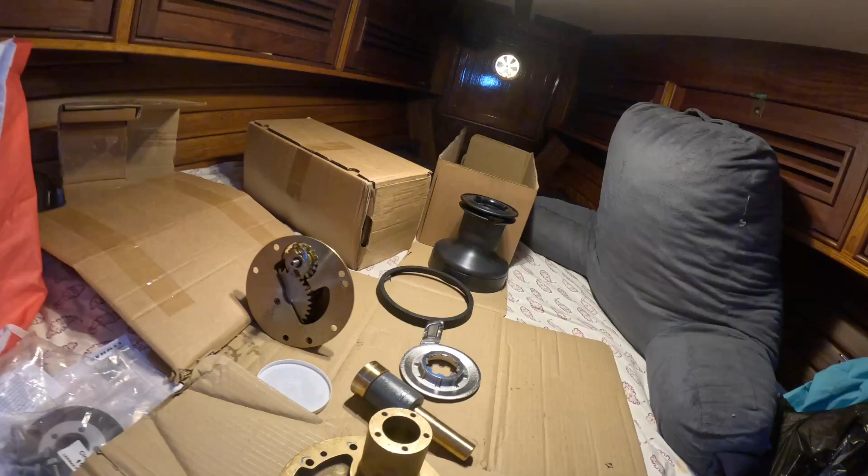This week we install an electric winch for our Genoa furling line. It's a big job with a lot of components.

I haven't had hair and makeup yet.

In the middle of the electric winch install, Greenpeace came to visit. Later on in the video, I'll talk a little about why it was such a big celebration for the people of Rongelap to have the Greenpeace people come.

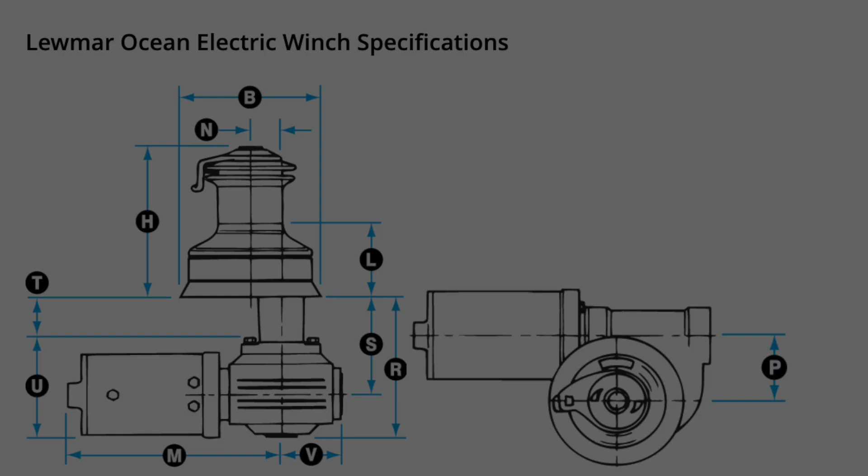We install a new electric winch. It's a complex installation with power needing to be run directly from the batteries.

The first step in installing the new electric winch is to remove the old winch. So we've removed the nuts from some of these bolts.

And maybe the other screwdriver, honey. This is the one we did, right? Yep. And now that we've got the nuts off the back, we can unscrew these bolts.

Proper winch installation requires a backing plate to help distribute the load.

The scariest part is drilling a hole in our boat, right? Because the electric winch has a shaft which goes through to the motor, which is mounted underneath it.

See from here, we literally drilled for days. We started with this hole saw, which I think is an inch, but we had to borrow a 2-inch hole saw to be able to drill the hole through the deck.

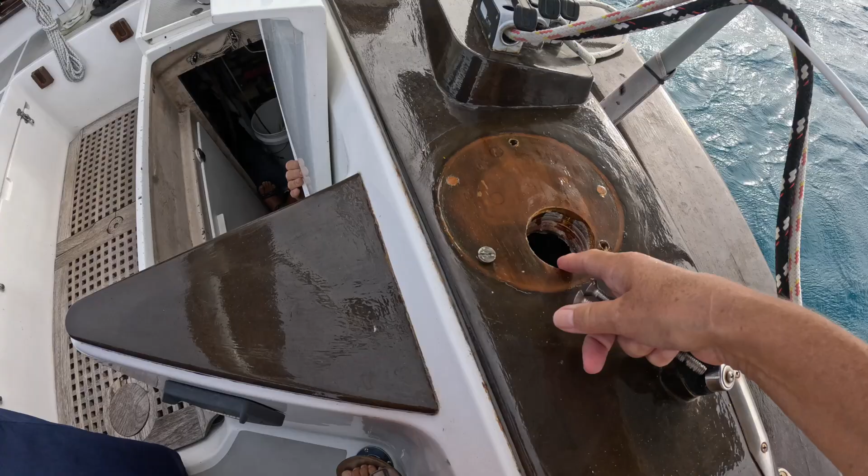Now we have to reattach the backing plate so we can drill a hole in the appropriate position for the new winch. The backing plate is a 1/4-inch aluminum plate, and it took a while to drill that through.

Working in the tropics is really exhausting, so we would work as much as we could, but when it's 85 degrees, one gets really tired quickly and you need to take a break. Luckily, it's beautiful.

Here's the final installation of the new winch, just the top part, obviously. We dry fitted first, and now we're putting caulk and screwing it down finally.

So why an electric winch for the furling line? Well, we're old, and we have a stay sail, so to tack we have to roll our Genoa fully in. So it makes short tacking on this boat very, very difficult.

It's also hard when you're sailing through a line of squalls and a 30-knot squall comes roaring at you, and you take in the Genoa, then let it out, then take it in again. You can do that like 10 times a night. So it'll help with our level of exhaustion, and ultimately, hopefully, we'll have safer sailing.

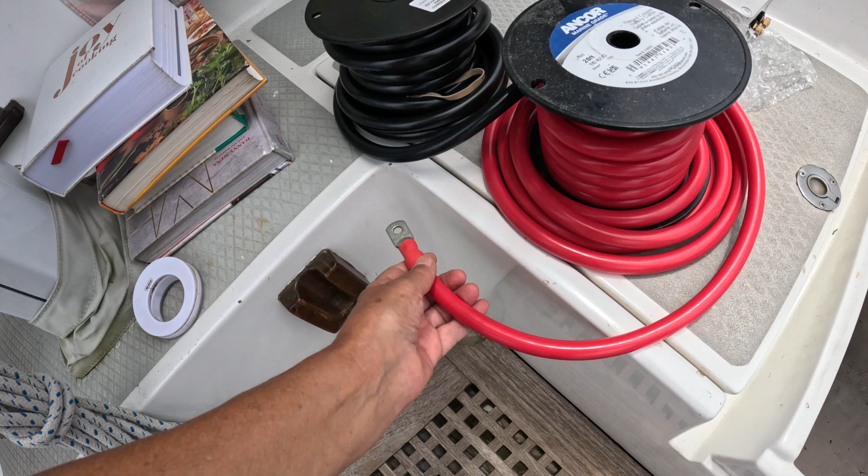Wow, this one, hey, you already put the lugs on them. Gonna be heavy duty wire. Those cutters, they're like enormous.

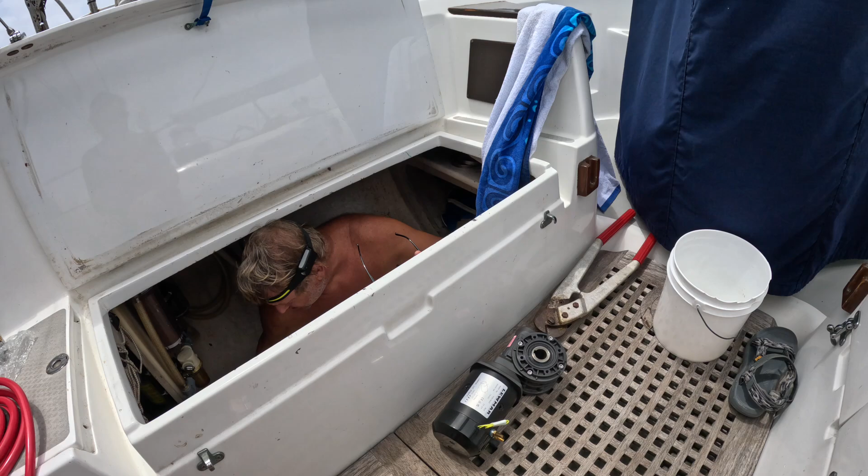Today, we're installing the motor. It won't have any power until we do the battery side, but one step at a time.

Hand me the electronic box. Here, take it.

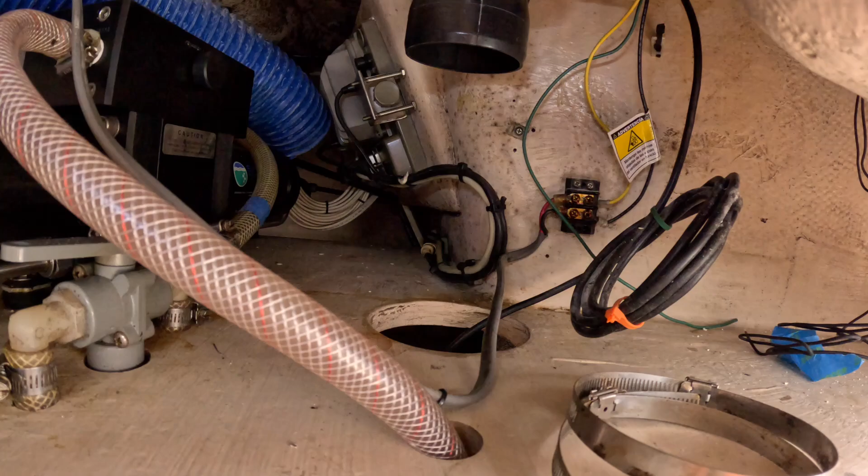So this is what we're dealing with. That's where the motor goes, up there, hanging down from those bolts.

That's an air blower that blows air on the engine to keep the alternator cool. This is our water maker right here on the side.

The real challenge is going to be getting that motor up there in place and then tightening those 4 bolts, which I can barely reach. But first I've got to figure out where to put the electronic control box.

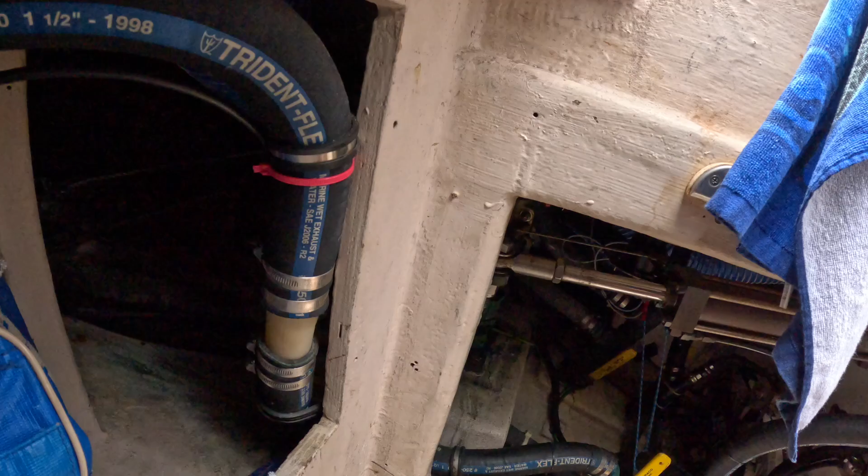So you can attach the big wires on? Yep, I would take it off. The winch motor is very heavy, and we couldn't figure out how to hold it up there and bolt it on. There's only one person who can fit in there. So we used books and pillows to wedge it up so Jordan could get one bolt in, and then he got the rest of them.

So here we are. The motor has been mated to the winch. So far I've got 3 bolts in. The 4th bolt is not visible and it's going to be a bitch to get to it. But that's what I'm going to try now.

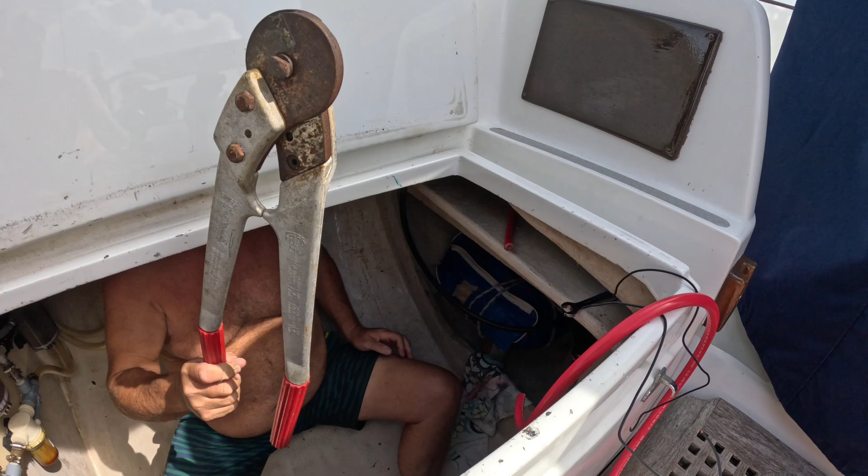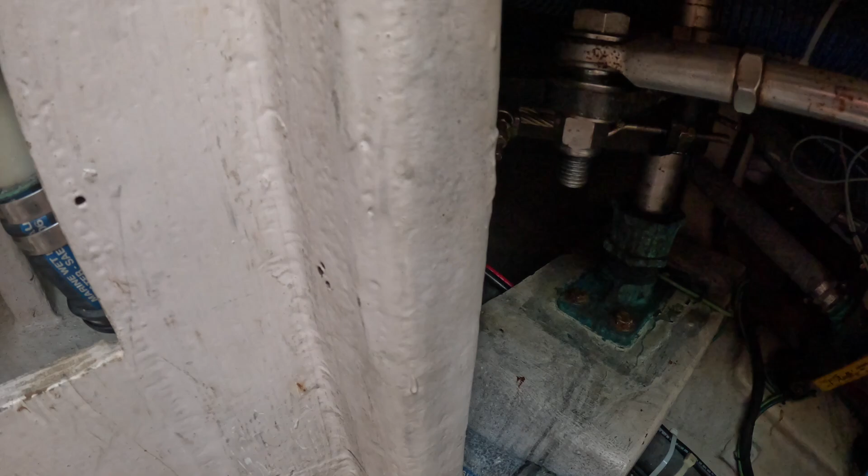It's a complex electrical job with both control wires and power cables needing to be run. Okay, so this bit is done. You can see the Lewmar control box, which has all the control wires attached to it for the switch, the power cables that go to the motor up here, and the other end of the power cable goes to the battery. Down here you can see the red and black cables.

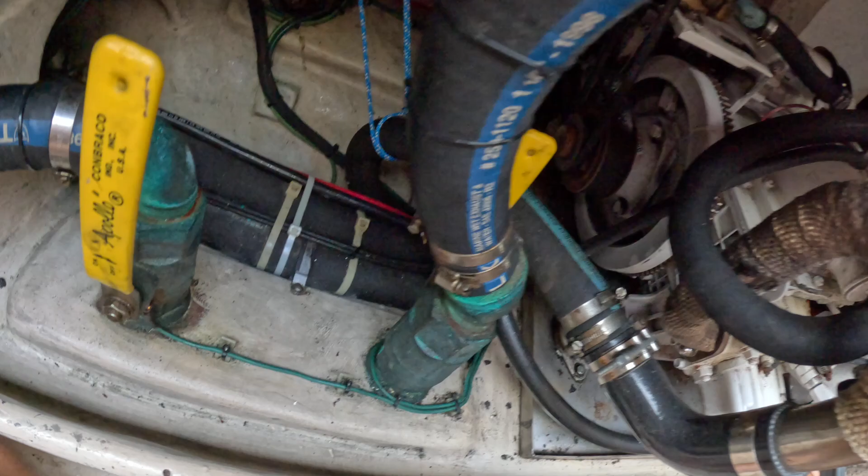I ran them underneath the generator. Here's the generator. You can see they go under the generator and come out over here in the shaft alley. Those gigantic cables are meant to carry a lot of amps.

The motor is 700 watts. It should draw about 50 to 55 amps. Obviously I still have to run these big cables up into the bus bars and crimp them and connect them, and then we're done.

Oh, I don't know, it must have been really hot.

It's just a mounting bracket for the cutoff switch and the circuit breaker. These parts are going to get epoxied onto the bulkhead under the cockpit locker, and then these screw into the brackets.

Did you bring me the headlamp like I asked? No, I brought you the GoPro though. Do you want the wire cutters? Yes, honey, I'd like the wire cutters. The cable cutters, cable cutters. They're so big. Uh-oh.

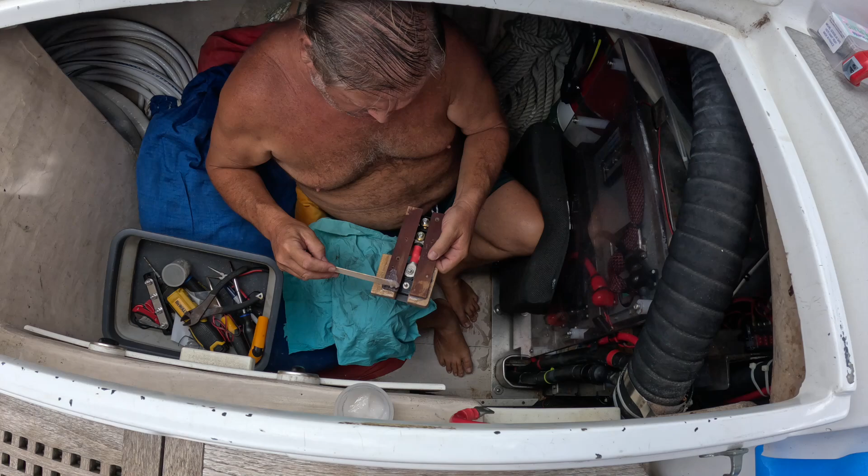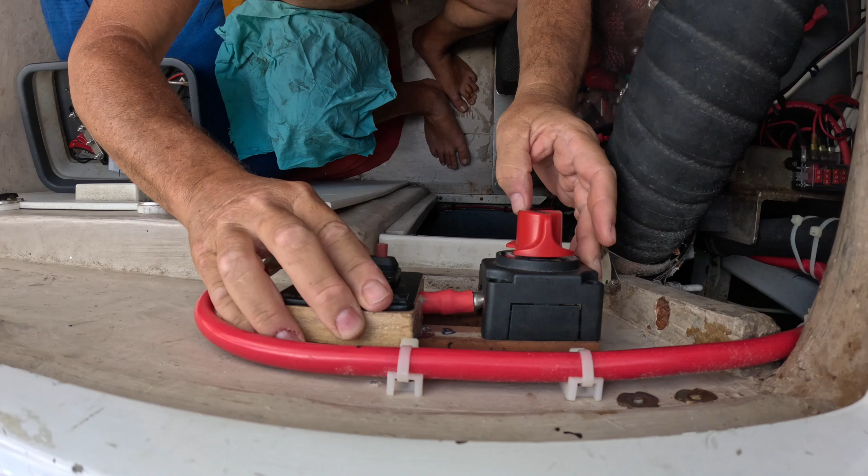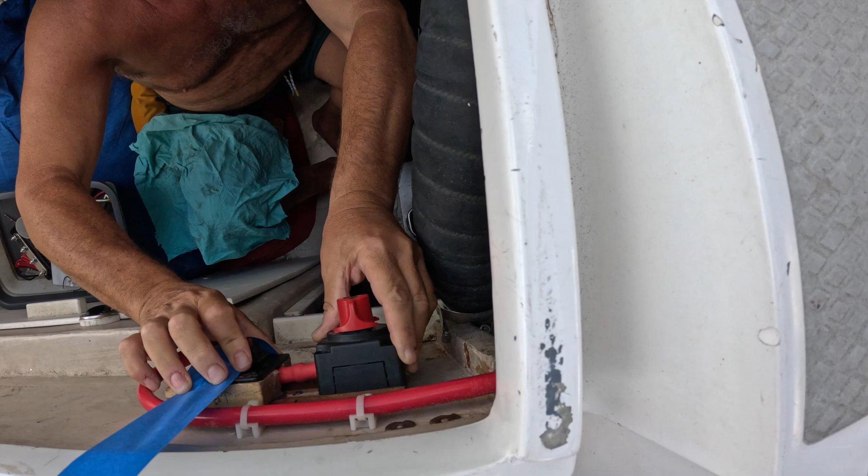Crimp it. Give me a third piece.

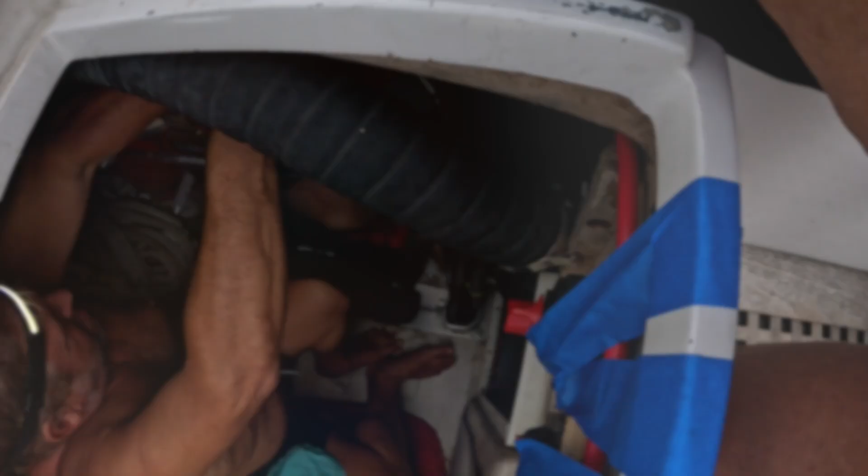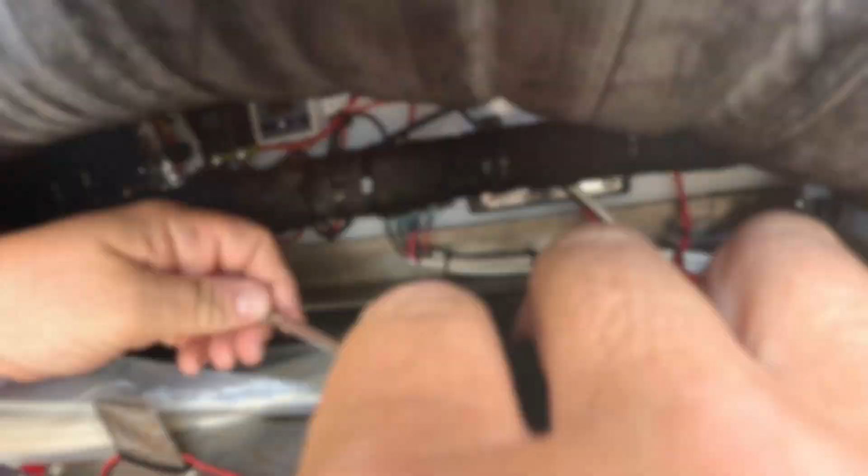So here we are in the portside cockpit locker where the batteries are located, along with a lot of other stuff. Here is the new electric winch control panel, consisting of a shut-off switch, on-off, and a circuit breaker.

Alright, this is the first test of our electric winch. Woo! It's turning all by itself! Look at that, a little smile with help from electricity.

40 years ago, one of the original Rainbow Warrior boats helped the people of Rongelap evacuate from their atoll. It had been contaminated from nuclear tests done on Bikini. They were not properly informed, or perhaps the people didn't know the level of contamination that had spread. The water, the soil, everything was contaminated. Nobody would help them leave Rongelap to get to Majuro, several hundred miles away. Rainbow Warrior showed up and made repeated trips to bring everybody from the atoll to Majuro. And so here they are, the descendants of those people, welcoming Greenpeace back to the Marshall Islands.